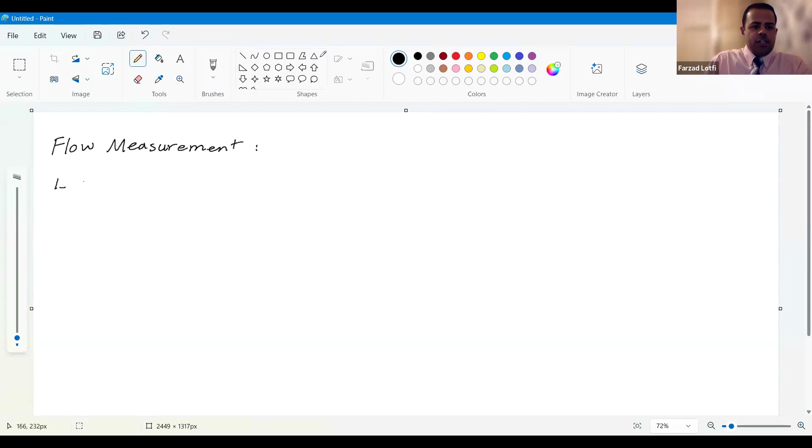Before anything else, I want to tell you that we have options to measure flow based on two different units. The first is based on volume, and the second is based on mass. For volume, I can say cubic meter per hour, or liter per minute. For mass, I can say kilogram per hour. This is the first item you need to bear in mind.

Which types of flow meter are suitable for measuring these things? I want to mention one of the most challenging things, and step by step you'll get familiar with why it's so complicated and sophisticated. First, if you want to convert these two units, these two dimensions, to each other, you can apply the density.

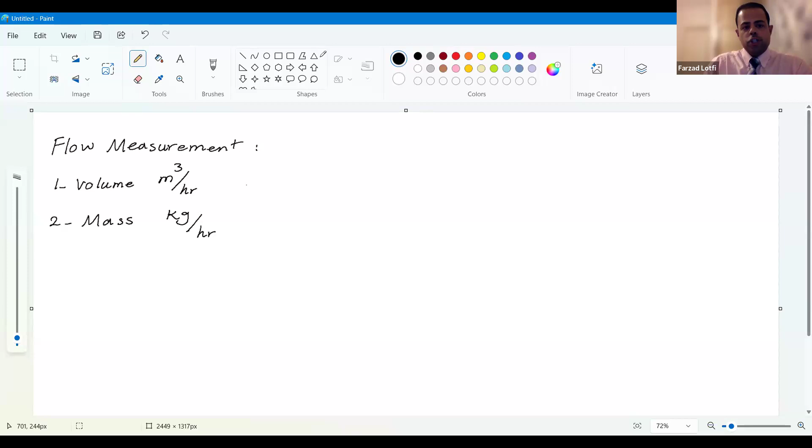If you multiply the volumetric flow measurement by density, you can reach kilogram per hour. But there's a point here: for some cases, the density will change.

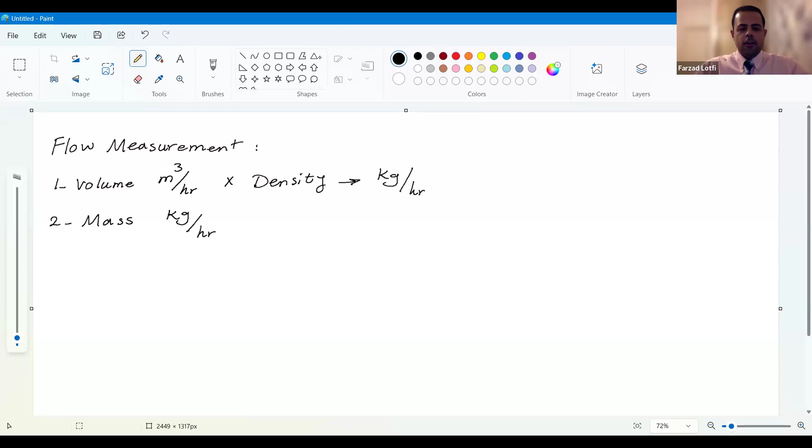How? Just imagine air and gas. For air and gas, when the pressure goes up, unfortunately the density goes up too. So there is a direct relation between pressure and density. When we take temperature into consideration, we find that when temperature goes up, the density comes down. So there's a reverse relationship between temperature and density.

Now imagine you want to measure the flow of air or gas in your piping. Unfortunately we do not have an ideal case in piping. Step by step, every second, every minute, the pressure or temperature, or even both, will change. So in this case the density is not fixed. As you know, density is kilogram per cubic meter, and we know the kilogram, the mass, is always constant and cannot be changed.

So when the density changes under changing pressure and temperature, the volume will change. Now, when the volume changes, the flow, the volumetric flow, is going to change. So you cannot be certain or sure about the amount you read on your flow meter. In this regard, all the things are wrong.

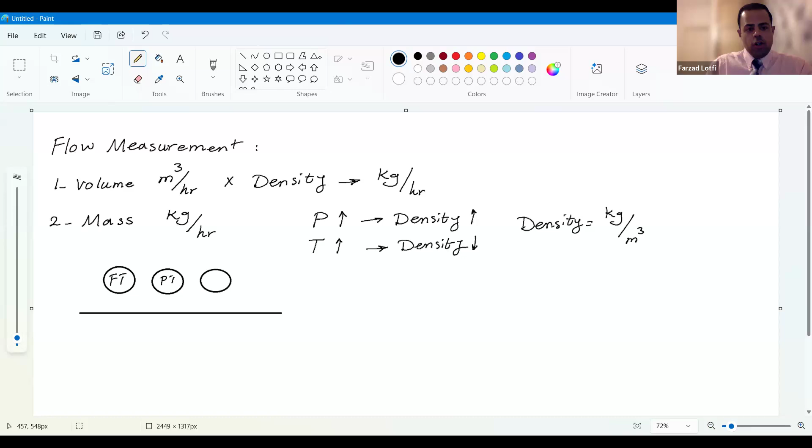Now I have 3 transmitters here. The first one is a flow transmitter, the second is a pressure transmitter, and finally we have a temperature transmitter. As a point, please bear in mind that when you want to install a pressure transmitter or temperature transmitter in the line, you must install them after the flow meter.

Because by using these two items, you might change the profile of the fluid, and the turbulence that forms in the pipe will have a really bad effect on your flow meter. Step by step, I will teach you about these things too.

So after that, we need a flow computer. We can mention or specify it as FY, which is related to flow computing. So there's a flow computer.

For this one I can give an example: the Flow X model from ABB brand, or even the Summit 8800 from Krohne, can be found in the market.

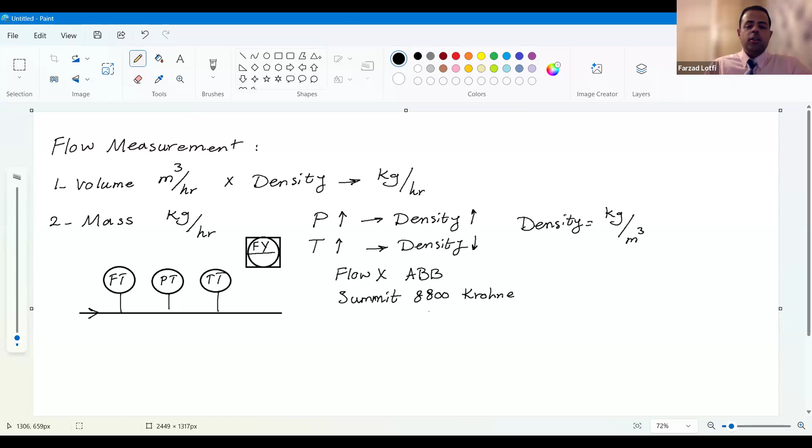We can use it and connect these signals to this flow computer. With the help of some equations, the density is measured all the time, permanently, based on the changing pressure and temperature. I mean density is always calculated, and after that, density is multiplied by the volume flow that these flow meters read or show. Finally, we reach flow based on mass.

This is one of the most important things I wanted to mention first. The second point I want to put my fingers on is the Reynolds number.

Reynolds number is one of the most important things that you need to have in your mind. First of all, Reynolds number presents the profile of the fluid. Sometimes the fluid is laminar, meaning it's very close to the linear form. Sometimes the fluid is transit, and sometimes it is turbulent. For each of these cases, we have a Reynolds number.

I just wanted to draw some examples to clarify this matter. Step by step, we will talk about some more things about Reynolds number for other flow meters too. I saved these pictures, the paint files, for you too, and by the end of the webinar, I will submit all these to PEA company, and if PEA company wants, they can send it for you too.

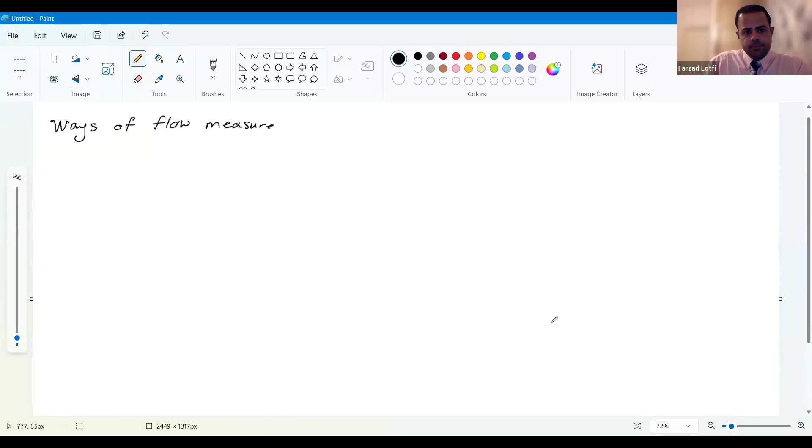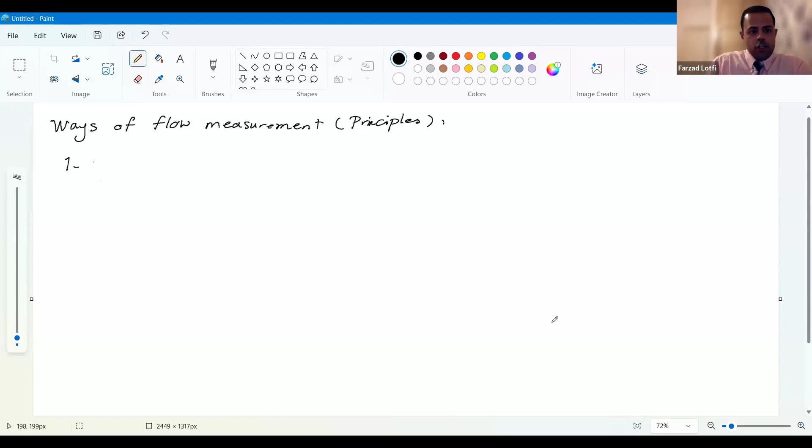Another topic I want to present now is related to how we can measure the flow in the pipe. In this case, we have two principles. I want to show the ways of flow measurement, to talk about the principles. So the first one is measuring the flow based on differential pressure.

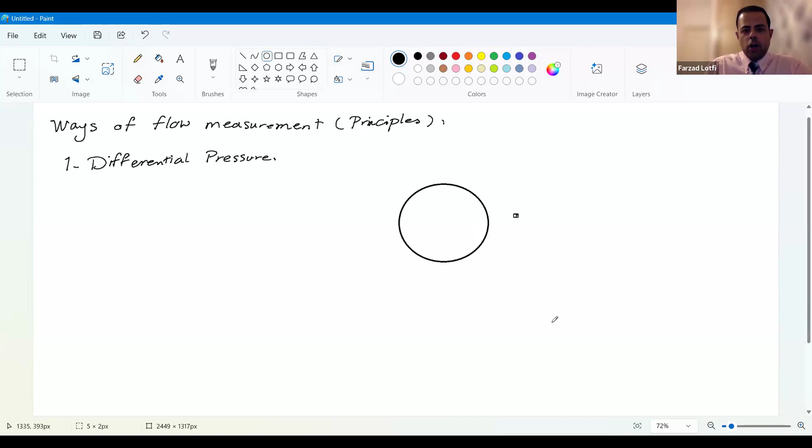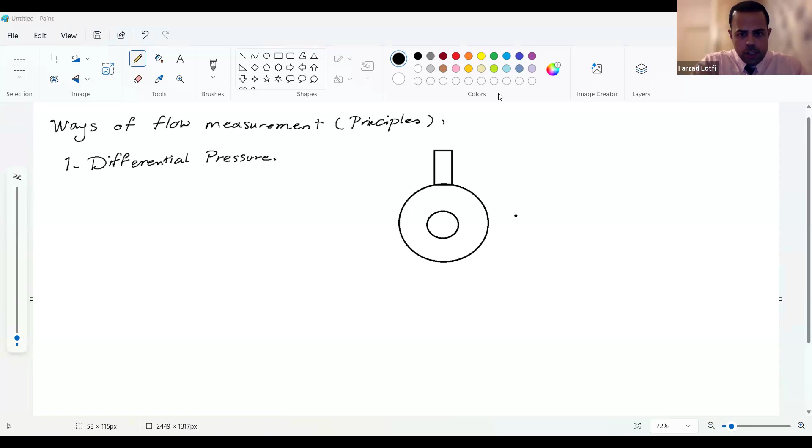Now let me draw something for you, and then we will talk some more about this one. I'm talking about an orifice. When we're talking about an orifice, it's just a plate with a hole in the middle of it. Let me share my screen with you. Okay, this is my screen, and I suppose you can see this Paint file too.

As you can see here, there's an orifice plate. Orifice plate is one of the most important devices or instruments in this industry, the instrumentation industry, to measure the flow. It has a lot of profits. For example, the first one is that it's very cheap. To tell you the truth, it's the cheapest way of flow measurement. That's why when you look through a refinery, you will see that maybe around 50% or even 60% of the instruments for flow is based on the orifice. But unfortunately, it does not have a really good uncertainty, and it does not have a good accuracy either.

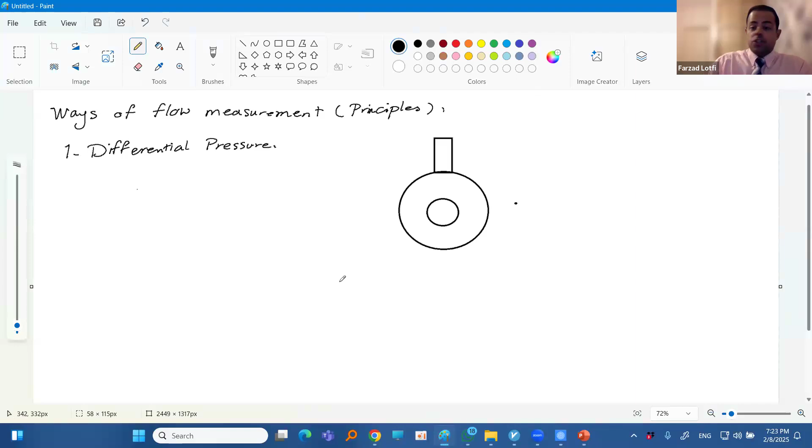Moreover, there's one more thing I want to say, related to the differential pressure, and it's about the turn down ratio too. So before anything else, I'm just writing turn down ratio.

Sometimes it's called rangeability too. It's the ability of the instrument to measure the flow over an interval. It's a kind of relation: it's just the maximum of the measurement divided by the minimum of the measurement.

Each instrument has its turndown ratio. For example, for the orifice we can imagine 3 to 1. For a variable area flow meter, I mean rotameter, we can have around 10 to 1. For a turbine flow meter, around 20 to 1. But for an ultrasonic flow meter, it can be even 200 to 1.

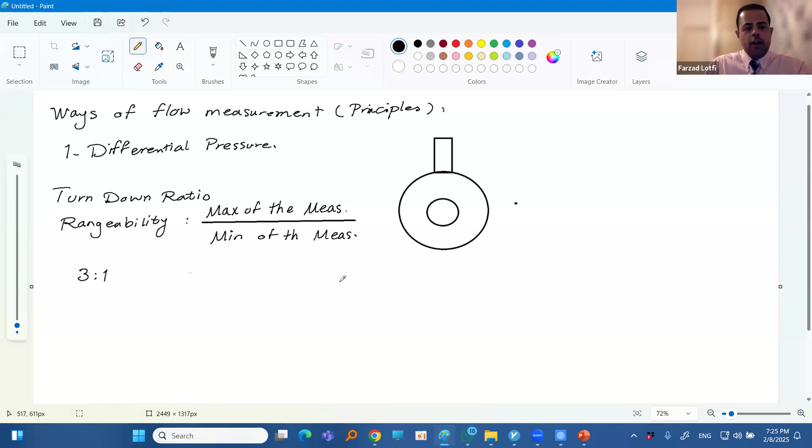So what does it show? It shows that when the flow meter can measure, for example, 300 cubic meters per hour as the maximum, it can measure just, for example, 100 cubic meters as the minimum. That's why it shows a turndown ratio of 3 to 1, so 300 to 100. In this regard, this flow meter cannot measure 0 to 100.

That's why this interval is called zero cutoff. Sometimes it's called zero cutout too. It means that this interval cannot be measured by this device. To tell you the truth, the best period for measuring with this device is between 100 and 300, because the linearity of the device is fixed in this part.

So this is another factor or criterion that you need to have in mind when you want to design a range for your flow meter. You need to have the minimum flow of the fluid inside the pipe, the operational flow, and the maximum flow in the pipe too. You need to consider all these data, because all of them must be placed in this range. This is one of the challenging things that I've faced in different projects many times.

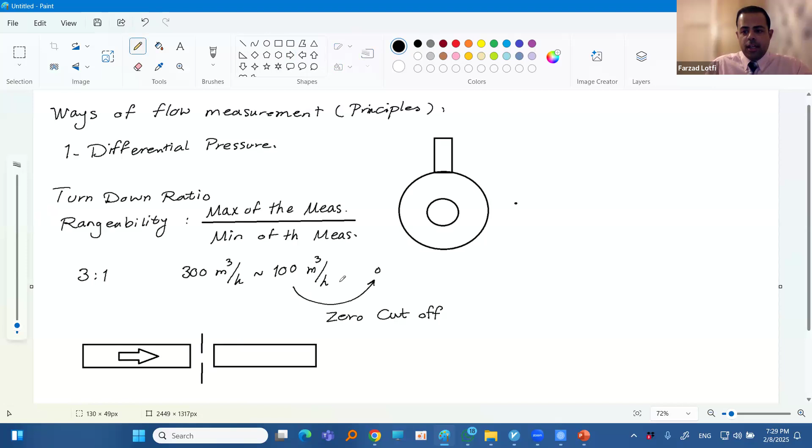It's a simple thing: we can put two isolating valves on the flanges, and now we can connect these two tubes to a differential pressure transmitter. As you know, this leg is high pressure and the other one is low pressure. Please bear in mind that we consider this based on the flow direction.

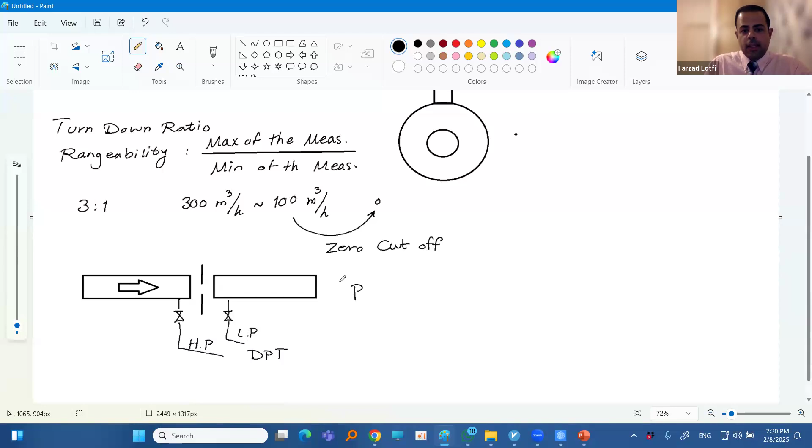I mean, the upstream of the device will be high pressure, and the downstream of the flow element will be low pressure. This is another thing that I just want to show you, that the pressure and the velocity have the reverse direction. This is the velocity. It's just based on the Bernoulli constant, or the Bernoulli equation. When the pressure goes up, for sure the velocity comes down.

So this point is the point where we can find more Reynolds number. Here we have a greater Reynolds number. Why? Because at this point we have more velocity. For sure the pressure has dropped in this part.

So with the help of measuring the differential pressure between these 2 points, we can find that flow has an equation, or has an equality with K, as a kind of fixed constant, times the root of delta P. Delta P is the differential between these 2 points. And in this regard, we can find what flow is in our pipe.

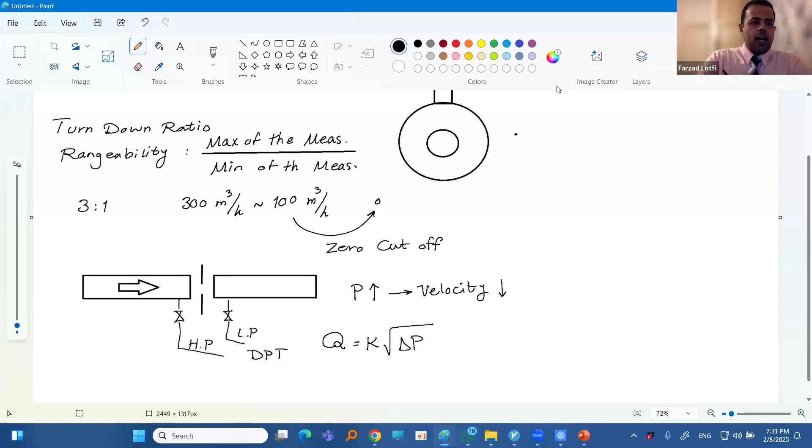Again, I'm just saving this page for you.

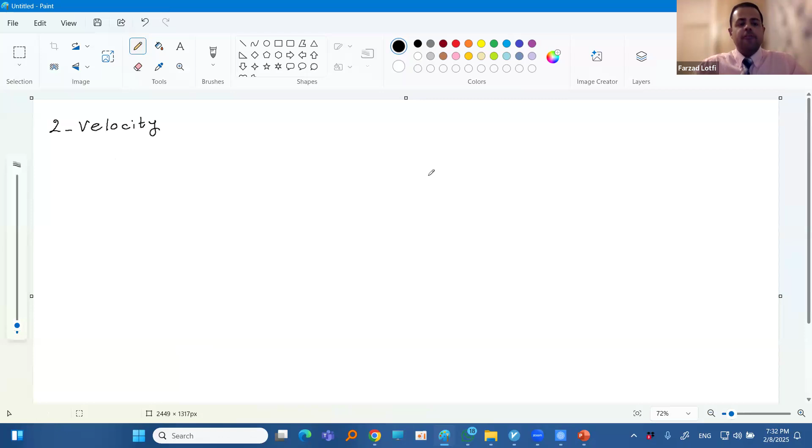This is the second principle that I want to specify, and it's based on the velocity. Now, when we can calculate or measure the velocity in the pipe, we can find how much flow is in that line too. How? Flow is equal to A. A is the area, or the cross-section of the pipe.

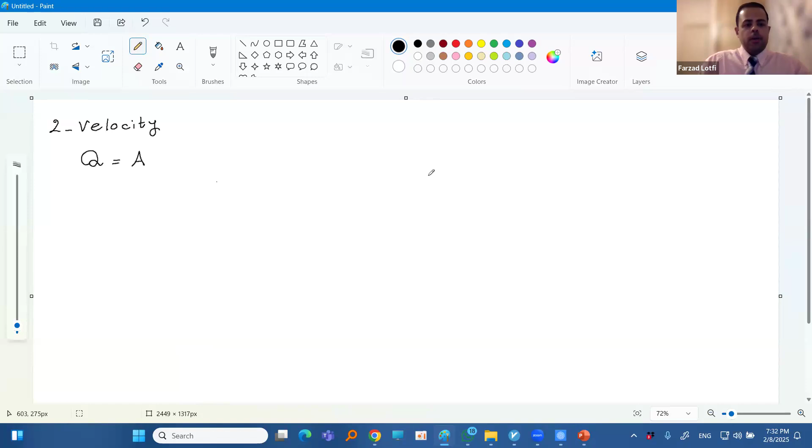It's multiplied by velocity. So there are a lot of devices that we can apply to measure the velocity. For example, one of the most famous ones is the turbine. Another one is the vortex flow meter. We even have the magnetic flow meter too. So these are the principles that I mentioned, and based on these items, we can find out the flow inside the pipe.

Now, I want to continue with some more things, and you can find another clip that I myself prepared for you for this webinar. Let me just stop sharing and share this screen again to be sure whether you can see it or not. Okay, I suppose everything seems well now.

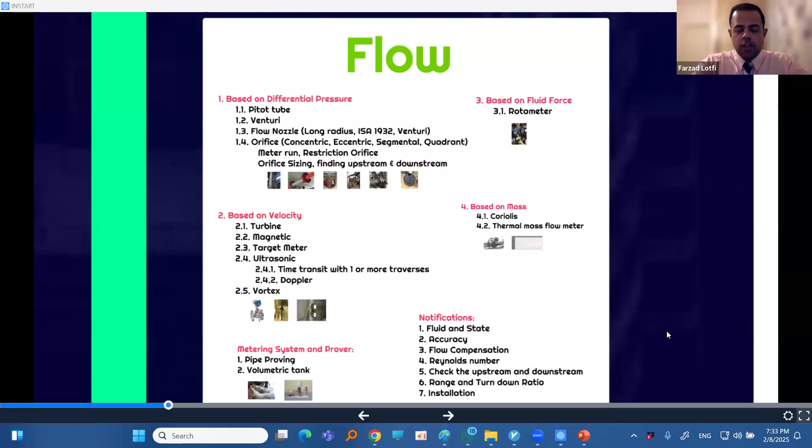So it's about the flow measurement. Now we want to talk about all these things as a kind of briefcase. So this is the first item that I mentioned. It's the basic one for sure. It's about the differential pressure. As I mentioned before, it's the simplest and the easiest way.

For sure, these items have a lot of advantages and benefits in industry too. For example, looking at the size, we have a wide range of pipe sizes that we can use. We can find them from 1 inch pipe up to even 120 inch pipe. So we can find them in a big range of pipe sizing.

Moreover, they do not have any limitation in measuring fluids. They can be used for liquids, for steam and vapors, and even for air and gas. So that's why I can tell you it's the easiest and simplest way, and it's the most applicable one in different industries such as oil and gas, mining, chemical, steel and stuff like that. These items can be categorized into different cases.

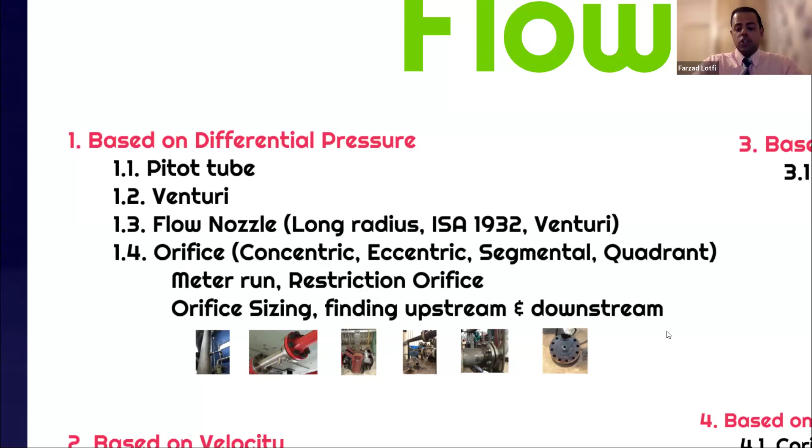Another thing I want to show you is really important. Please pay attention to this part. It's a question that a lot of participants, engineers and technicians ask me all the time: whether it's possible to install the flow meter in a vertical line or not. For sure, you can install all these flow meters in a vertical line. There is no exception. I'm saying this again: there is no exception for flow meters for installing in the vertical line.

But there's just one point. Please pay attention. If the flow direction of the liquid is from bottom to top, you can have this. And for gas services, when the flow direction is from top to bottom, you can install it too. Why? Because we want to keep the cross section of the pipe full all the time. If it's semi-full and not completely full, it will have an error in the measurement. And the only case where the liquid can fill the whole cross section of the pipe is when it flows from bottom to top.

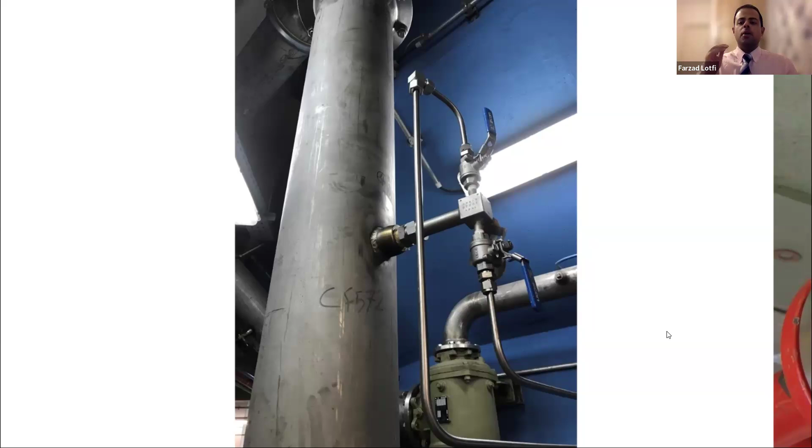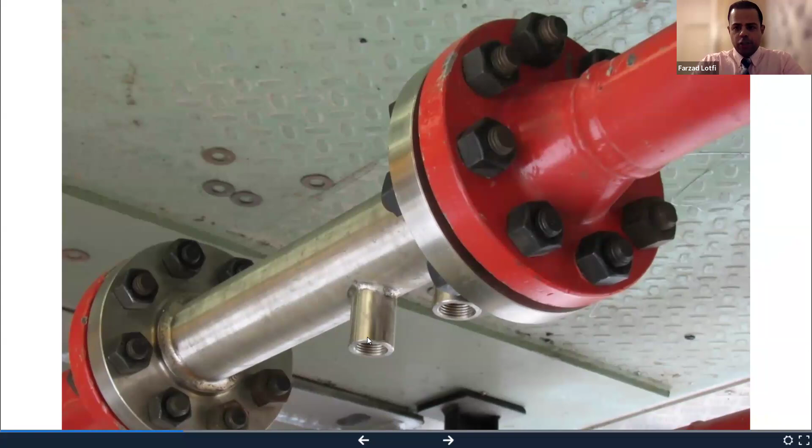Another one is the Venturi, presented before. You can see in the line that there are two taps here, and these two taps, which are always half an inch, are connected to the differential pressure transmitter via stainless steel tubes. The differential pressure transmitter measures the differential pressure between these two points. Finally, it can be converted to flow and sent to the control room, for example, with a 4 to 20 milliampere signal.

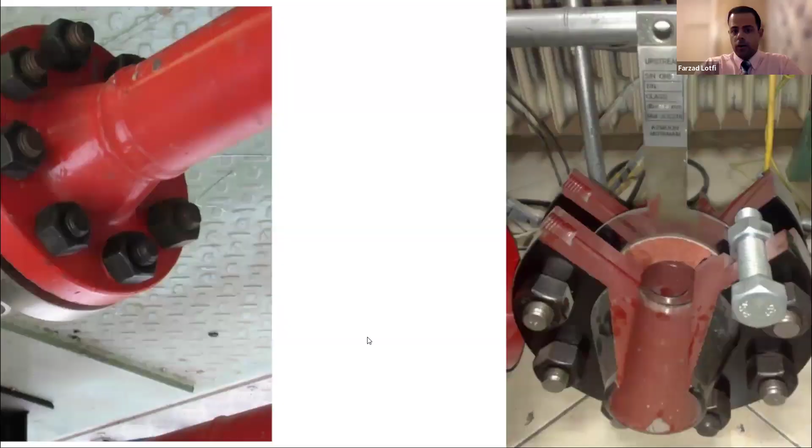Another one is the orifice. You can find this orifice; these two flanges will be supplied with the orifice too. It's really important to know that the direction of the fluid is really important for the orifice, because sometimes we try to change the shape of the orifice into the venturi. So in this case, the downstream of the orifice would be in beveled form. I mean the bore here is not cylindrical, but in this case we can find the beveled form in the downstream of the orifice.

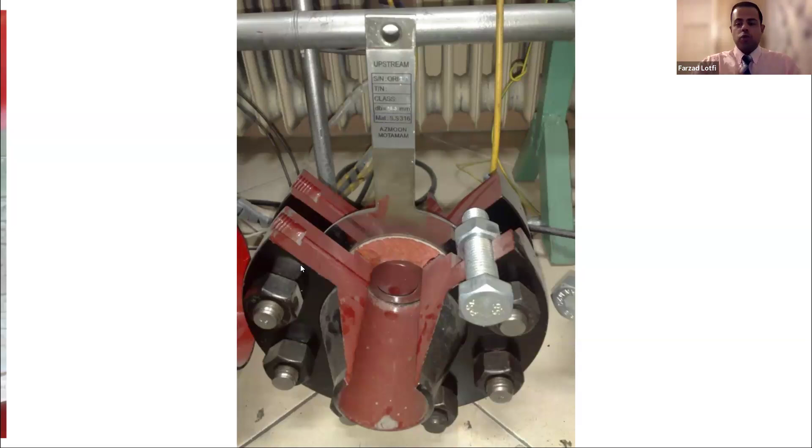So in this regard, it's very important how you install it. Sometimes some engineers and technicians believe that it's just a simple plate, so there's no difference whether we install it this way or that way. No, actually, it has a difference. As I mentioned, downstream of the bore is in beveled form, so that's why it's so important how you install it. Please bear in mind that we have a notification or caution on the handle of the orifice, and it shows how the flow will stream into the bore.

Another one, as you can see here, there is an orifice with the two tubes that I mentioned. The stainless tube would be connected to the differential pressure transmitter, and as you know, the differential pressure transmitter will always have a 5-way manifold as an accessory.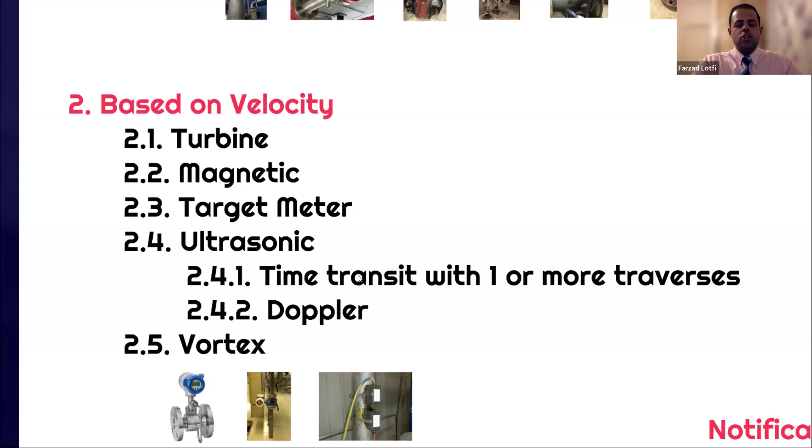But I want to tell you that it can be applied for the case of high pressure and even high temperature. Moreover, when particles or even debris can be found in the fluid, the vortex flow meter can still measure the fluid. So as compared to some other items, like turbine or the magnetic that I just mentioned, this device has less limitation. So you can find the vortex flow meter here.

And I want to draw your attention to something too. As you can see, there's a tube here on the vortex, which is related to the pressure sensor of the device. As I mentioned before, sometimes you need to convert the flow from the volumetric form to the mass form. So at first, you need to calculate the pressure and temperature, and after that, you need to multiply the corrected or compensated density by the volumetric flow, and finally it changes to flow based on mass.

So as you can see, this device is the compact form. It means that it already has its own pressure sensor, and it is calculated by itself. To tell you the truth, in this regard, there is no need to have the flow computer.

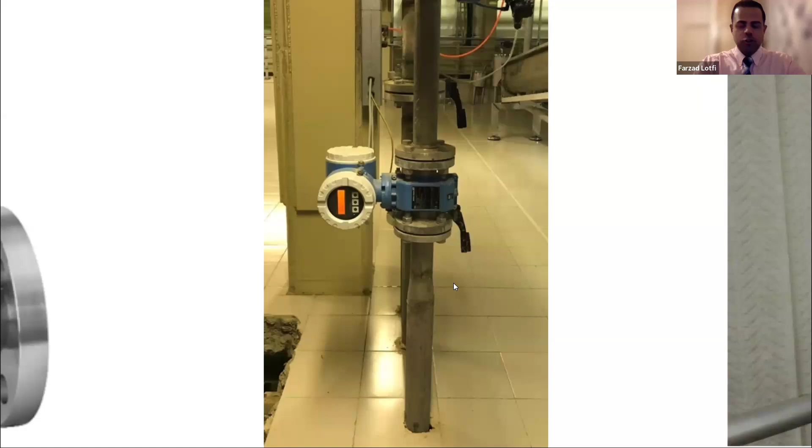Another one is a magnetic one. I put this picture for you to show that you can even install the flow meters based on velocity on the vertical line too. So it's clear that it has been performed and installed.

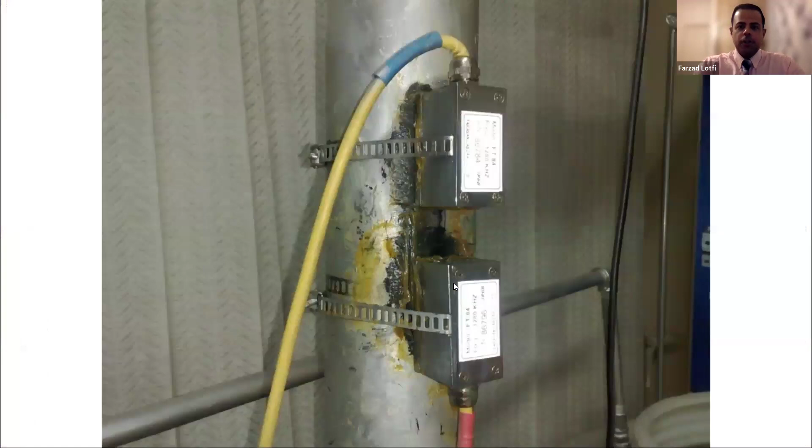Another one is the ultrasonic. This ultrasonic is based on the transit time. I mean, at first, the ultrasound wave is sent from the sensor to this part, and finally another one. There is another wave from this part to this item. As you can see, in this regard we will have a V form. That's why it is called the V configuration, or sometimes two traverse.

With the help of this installation, which is called clamp-on, there is no need for you to put the sensors under exposure to the fluid. As you can see, there's no wetted part here. I mean, there is no contact between the sensor and fluid. So that's why it can be used even for cases where, for example, the fluid is corrosive or things like that.

With the help of this type of installation, you can even install it on bigger pipe sizes. For example, up to 160 inches can be applied, and you can install it on the pipe without any problems.

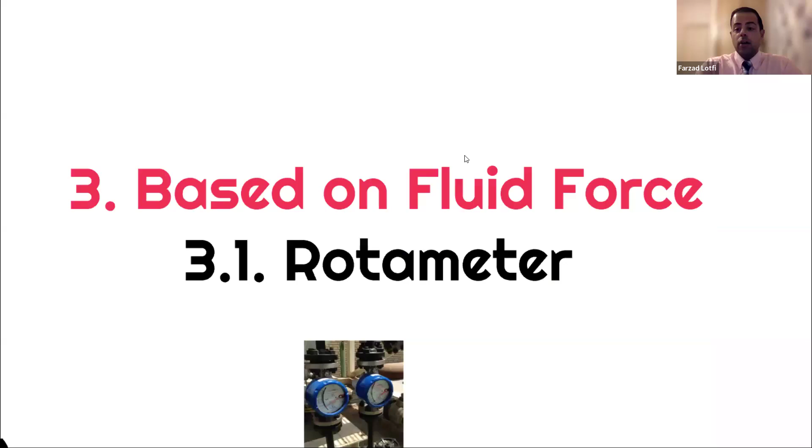Some more are related to the fluid force, and the best example in this regard is the rotameter. Variable area flow is one of the most famous ones. Unfortunately, one of the disadvantages of this device is that they are manufactured in smaller sizes, around just 4 inches. But hopefully they can be used for many types of fluids. You can apply it for liquids, or even when the fluid is erosive or corrosive, or when you find some particles or debris in the pipe. You can have this flow meter for measuring.

Unfortunately, they do not have good accuracy. It can be considered around 2%. But in the chemical industry, in utility, or even packages, you can find it, because in these cases we have small pipe sizes. For example, a corrosion inhibitor package, or a fuel gas package. You can find it there too.

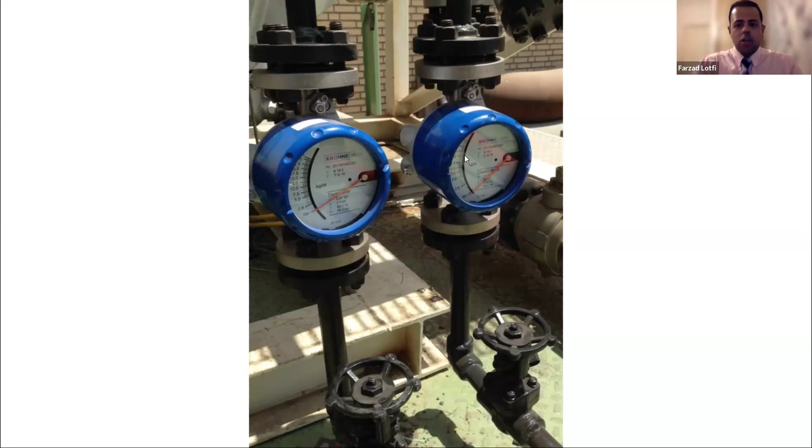Just some more things related to measuring flow based on mass. Up to now, we've talked about a lot of instruments for measuring flow, and all of them worked based on volumetric measurement. Now we want to talk about some devices that measure flow based on the mass. In this regard, there's no need for you to compensate the volumetric flow.

As feedback to my previous words, at first we used to calculate the flow based on volumetric, then multiply by density, and finally we had the flow based on mass. But these devices themselves actually calculate the flow based on the mass. That's why these devices can be categorized as the best type of flow meters.

Unfortunately they're very expensive, and you must know where you want to install them. For example, you cannot just use them for measuring water which drains from a vessel to, for example, closed drain. But sometimes they can be used for exporting fluid from one point to another, because financial matters must be taken into consideration.

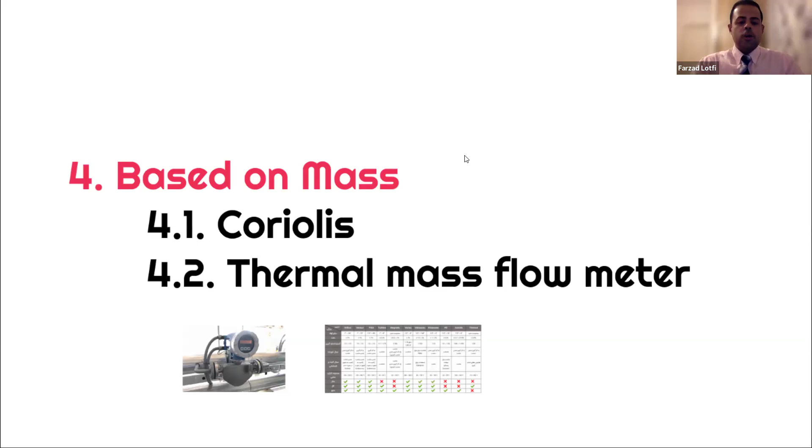Another thing I want to tell you about the Coriolis is that this device can also measure density, so you can apply this one for measuring the flow, and sometimes you can have it for measuring density too. That's why it's one of the most beneficial, high-tech flow meters. But I want to mention that unfortunately this device has been manufactured in small sizes.

As a routine size, the bigger one is 6 inches, but sometimes it can be manufactured up to 12 inches too. In this regard, the device will be sized and manufactured optionally. For finding a Coriolis of 12 inches, you may need to wait around 6 or even 7 months to be delivered. But as I mentioned, the routine size is just 6 inches.

For sure, it has really good accuracy, and it can be used for different cases too, for example for liquid, and even for gas, and other things can be applied.

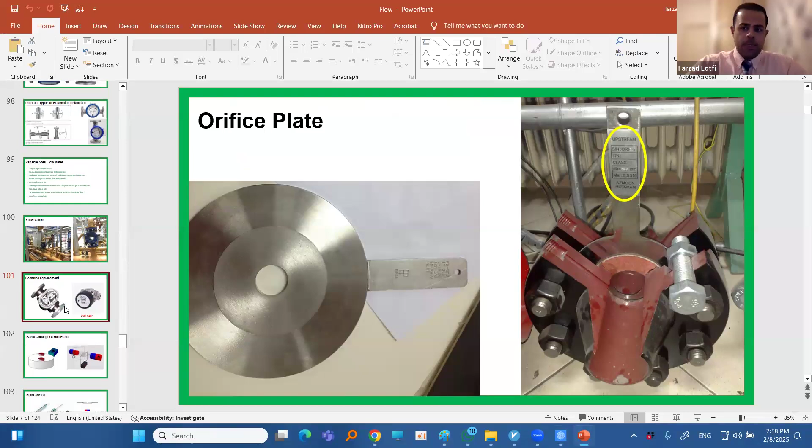There's one more thing I want to say about the PD meter, which is called positive displacement. As you can see, it's called positive displacement because we talked about different things such as high temperature, pressure, and even composition of the fluid which can include particles and debris and stuff like that. But I have not talked about high viscosity fluids yet.

Sometimes the fluid is high viscosity, for example tar or glue or even honey, which can be measured in different industries. One of the most applicable and famous devices for measuring this is the PD one, meaning the positive displacement. This device can only measure liquids, so please keep this in mind - it cannot be used for gas or vapors.

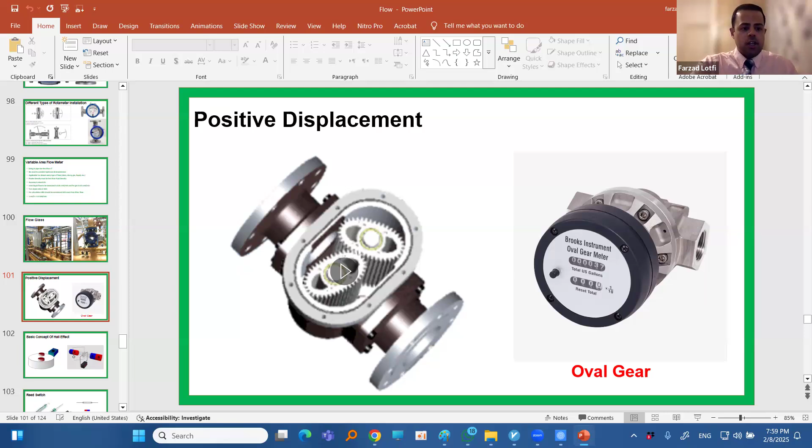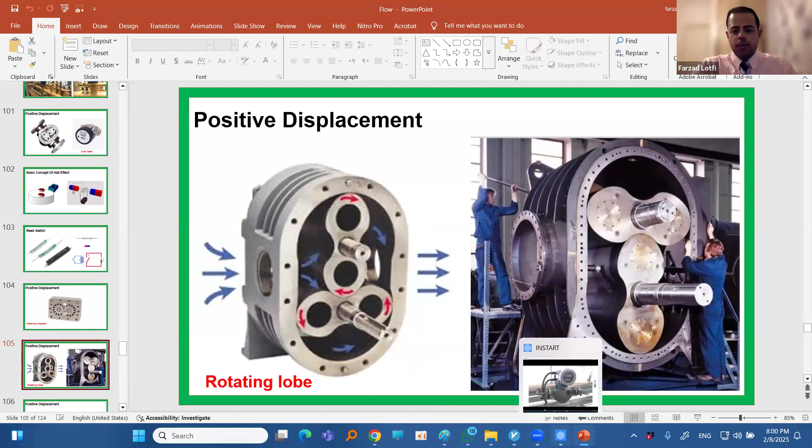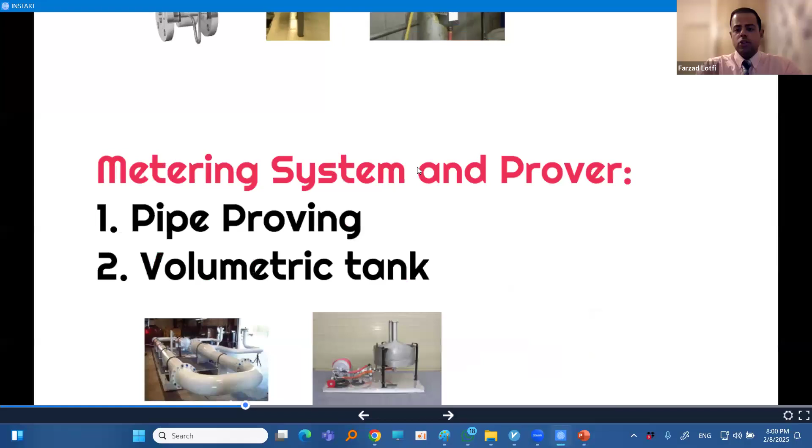Some more things about this item - I want to get back to the file to show you there are some points you need to bear in mind about the flow. I mentioned this as a notification: the fluid and its state are so important to find the best one. I made some examples for cases such as magnetic and stuff like that.

I also mentioned the accuracy - in some cases, such as orifice, it does not have good accuracy, but sometimes you have Coriolis with the best accuracy among all of them. Flow compensation is so important - sometimes you need to install a pressure or temperature sensor beside the flow meter to find out the mass.

I mean the flow based on the mass. Sometimes you just apply some flow meters which are compact. They themselves have pressure or even temperature sensors with them, and they can just give you the flow based on the mass.

Reynolds number is so important. You find out that it has a really big effect on the measuring of the flow. Then we have the upstream and downstream. It's so important, and you need to bear this in mind.

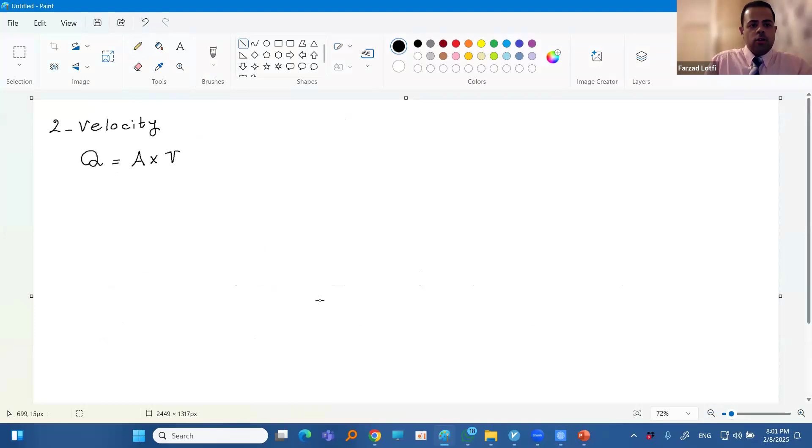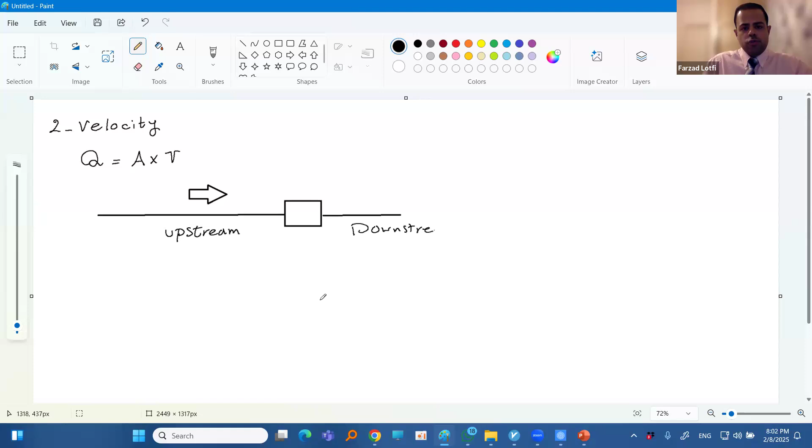What it is exactly: we need to keep the line straight from one point to the flow element. Imagine this is a line, and this is the flow element, and this is something you can see. This is the upstream, and this is the downstream. When, for example, we have an elbow in the pipe, you can find out that from the elbow to the flow element, we need to keep the pipeline straight.

Why? Because the profile of the fluid here must be laminar or linear. Otherwise, the fluid will be turbulent and it will have a really bad effect on the flow element. Sometimes you find the measured flow on the display, but it's not true. So this straight length must be kept. This length is completely different among flow meters. Some of them need a really long straight run, but some have a really short straight run.

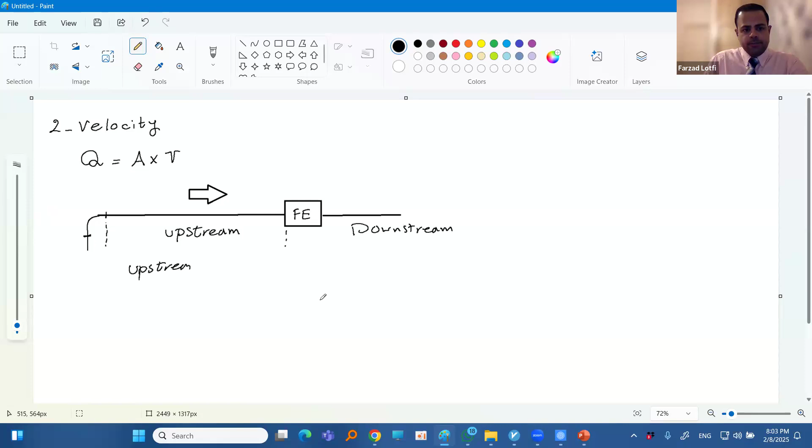For example, when we are talking about the orifice, this straight length for upstream can be from 6D, up to, for example, 50D. When I say D, let me write this for you - it's the diameter of the pipe.

Just imagine, for example, when you have an elbow, you might have around 20D for the upstream. In this regard, if the line size is 3 inches, you need to multiply 3 inches by, for example, 20, and it reaches 60 inches. It means that 60 inches from this point, from the elbow to the flow element, must be straight, and you must not put any other devices in this straight run.

And then we have the downstream. When I'm talking about the downstream, it's the length we need for the turbulence of the fluid, formed when it gets out from the flow element, to become calm and laminar again. So it can be around 5D to 7D for the orifice. This is downstream - it means that after 5D from the flow element, the profile of the fluid becomes laminar or linear. So this is an example for the orifice.

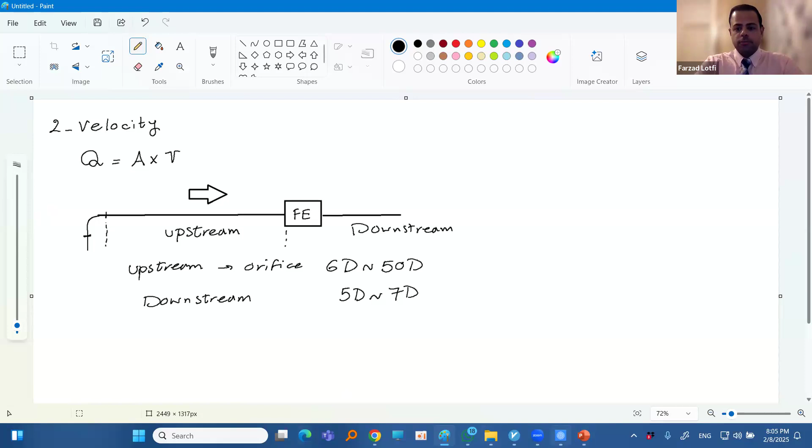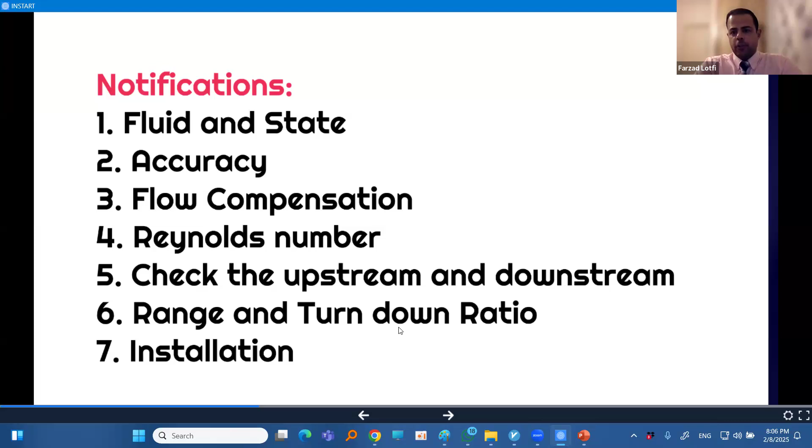For the last items, range and turndown ratio, as I mentioned before, it's so important because the amount of flow must be placed within the measuring range of the flow meter. And finally, we talked about installation - you can have the opportunity to install the flow meter in vertical lines too.

I want to show you some more things about these items to clarify some points. Let's put this one - I mentioned something about a magnetic flow meter. I want to show you, even for the case of magnetic meters, you can see this example here.

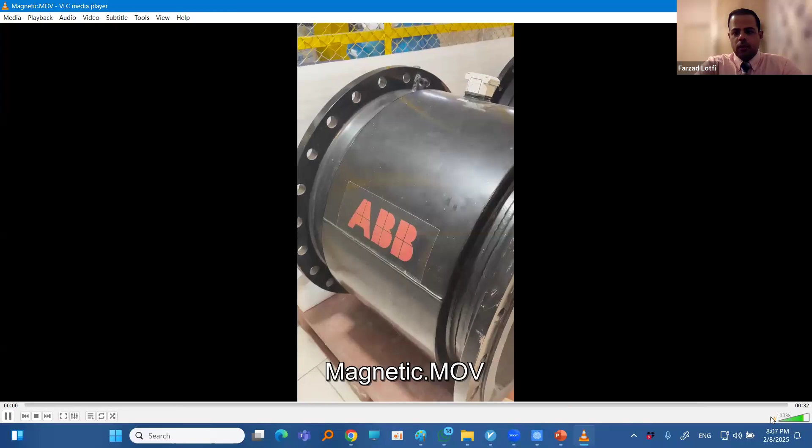As you can see in this movie, it's a 48-inch magnetic flow meter. It shows one of the most important things you can find in this movie: it does not have any moving part, and it does not have any differential pressure in the line.

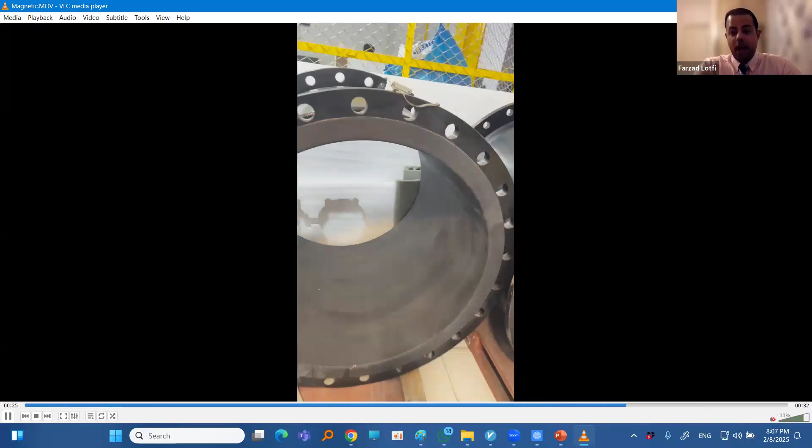Another thing about the upstream and downstream of the magnetic flow meter is that it's really less - 5D for upstream and just 2D for downstream will be sufficient. Okay, so that's it.

And now we just want to talk about some questions.